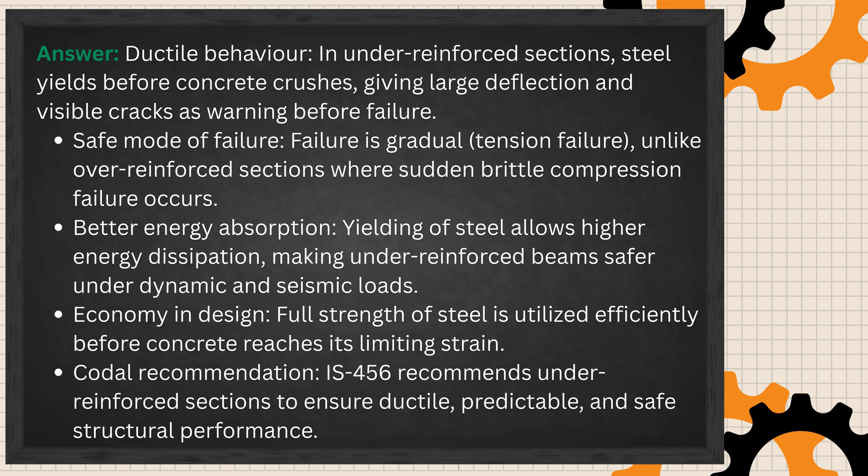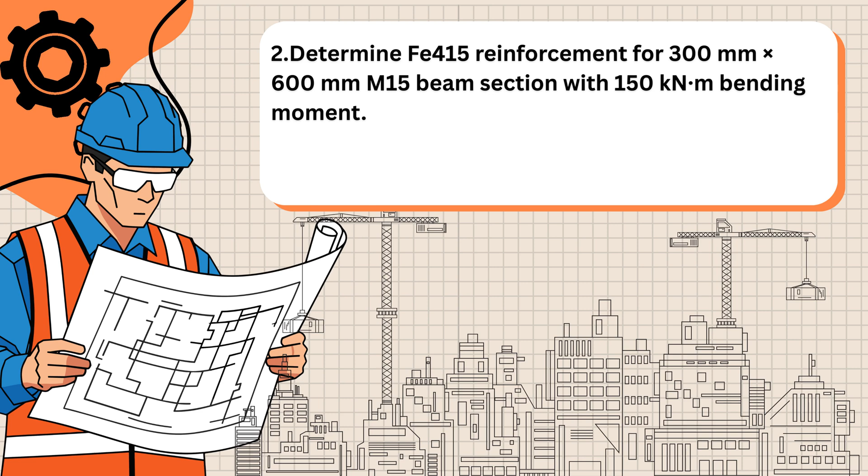2. Determine Fe 415 reinforcement for 300 mm x 600 mm M15 beam section with 150 kN·m bending moment. Answer. Given breadth B equals 300 mm, overall depth equals 600 mm, effective depth d equals 550 mm assumed, grade of concrete is M15, which means fck equals 15 megapascals. Grade of steel is Fe 415, which means fy equals 415 megapascals. Factored bending moment Mu equals 150 kilonewton meters, which equals 150 times 10 to the power of 6 newton millimeters.

Step 1. Check limiting moment of resistance. Mu lim equals 0.138 times fck times b times d squared. Mu lim equals 0.138 times 15 times 300 times 550 squared, approximately 187.9 times 10 to the power of 6 newton millimeters. Since Mu is less than Mu lim, the section is singly reinforced.

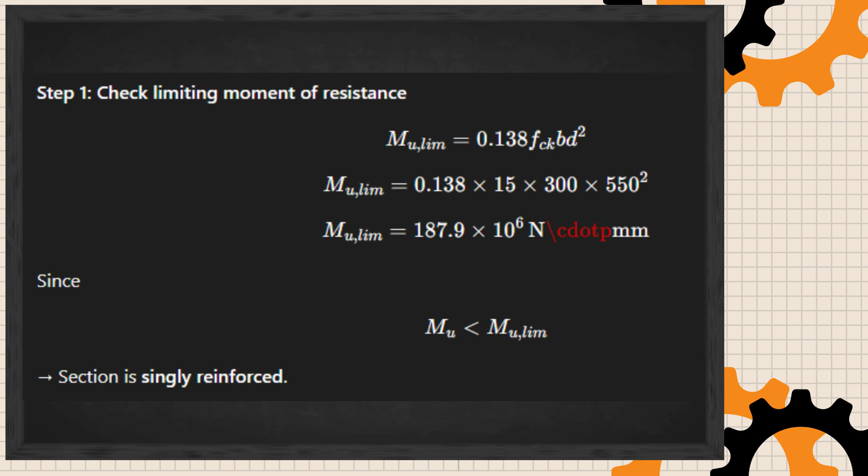Step 2. Calculate area of tensile steel. The formula is Mu equals 0.87 times fy times Ast times d minus 0.42 times Xu. For Fe 415, Xu max equals 0.48 times d equals 0.48 times 550, which equals 264 millimeters. Z equals d minus 0.42 times Xu max equals 550 minus 0.42 times 264, which equals 439 millimeters. Now, Ast equals Mu divided by 0.87 times fy times z, Ast equals 150 times 10 to the power of 6 divided by 0.87 times 415 times 439, Ast is approximately 947 square millimeters.

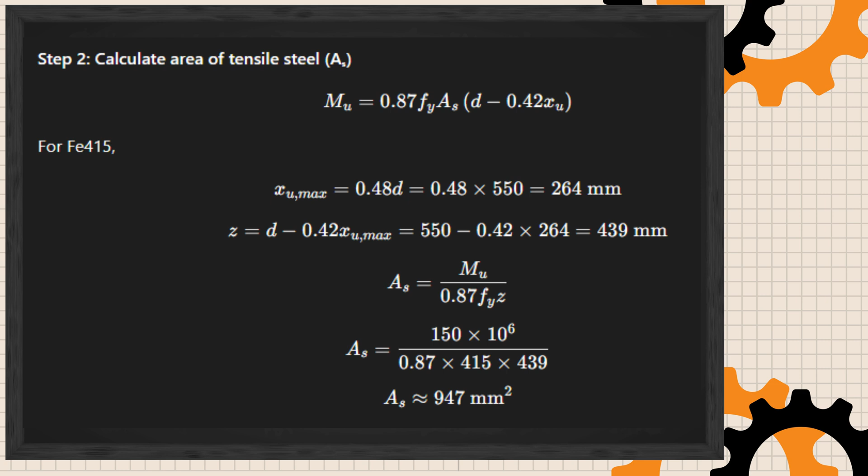Step 3. Provide reinforcement. Provide 3 bars of 20 mm diameter. The area of steel provided, Ast provided, is 3 times 314, which equals 942 square millimeters, approximately equal to the required area of steel. Final answer. Required tensile steel area equal to 947 square millimeters. Provide 3 numbers of 20 mm diameter Fe 415 bars in tension zone.

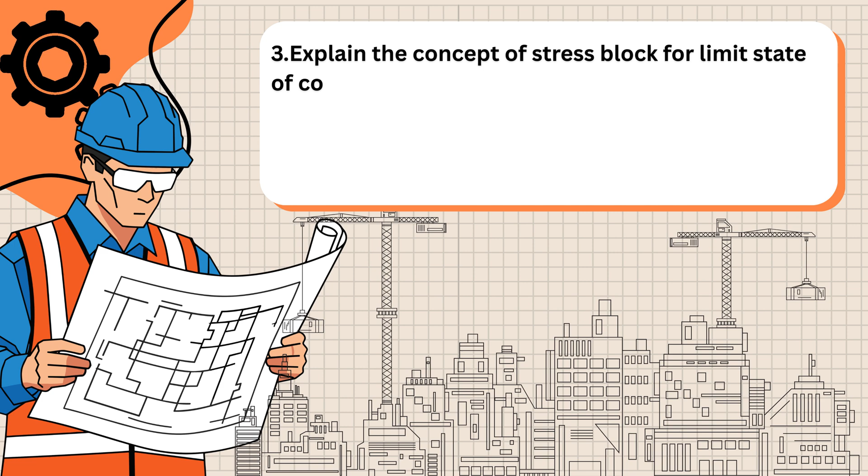3. Explain the concept of stress block for limit state of collapse in flexure. Answer. Concept. In limit state method, IS 456-2000, the stress block represents the assumed distribution of compressive stresses in concrete at the ultimate limit state of flexural collapse. Strain assumption: plane sections before bending remain plane after bending, and the maximum compressive strain in concrete at the extreme compression fiber is 0.0035. Stress distribution: the actual nonlinear stress strain curve of concrete is replaced by an equivalent rectangular stress block for design simplicity.

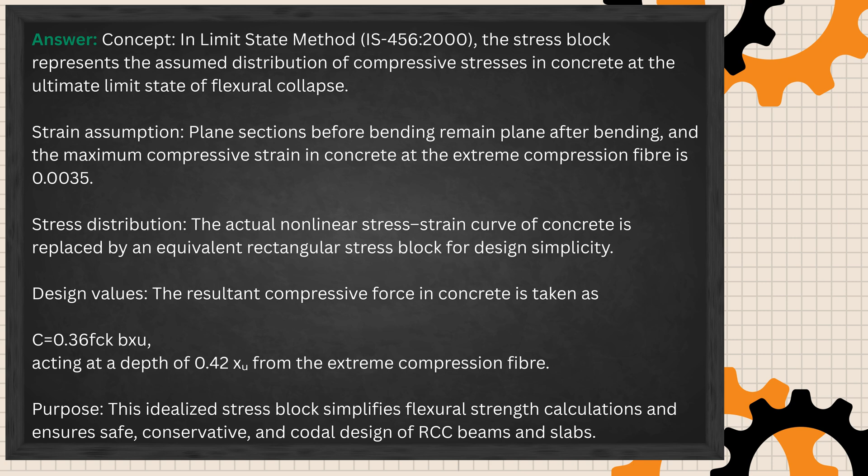Design values. The resultant compressive force in concrete is taken as equal to 0.36 fck b Xu, acting at a depth of 0.42 Xu from the extreme compression fiber. Purpose. This idealized stress block simplifies flexural strength calculations and ensures safe, conservative, and codal design of RCC beams and slabs.

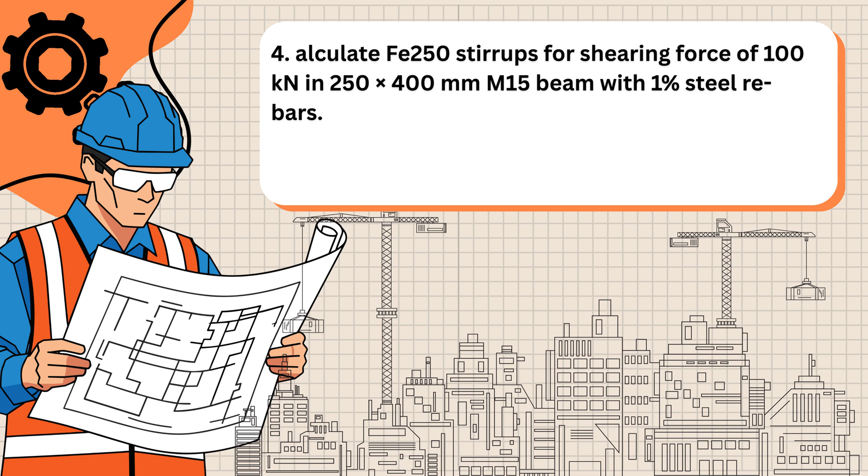4. Calculate Fe 250 stirrups for shearing force of 100 kN in 250 x 400 mm M15 beam with 1% steel rebars. Answer. Given breadth of beam B equals 250 mm, overall depth equals 400 mm, effective depth d equals 350 mm assumed, grade of concrete is M15, which means fck equals 15 megapascals. Grade of steel, stirrups, is Fe 250. Percentage of tension steel equals 1%. Factored shear force Vu equals 100 kilonewtons, which equals 100 times 10 to the power of 3 newtons.

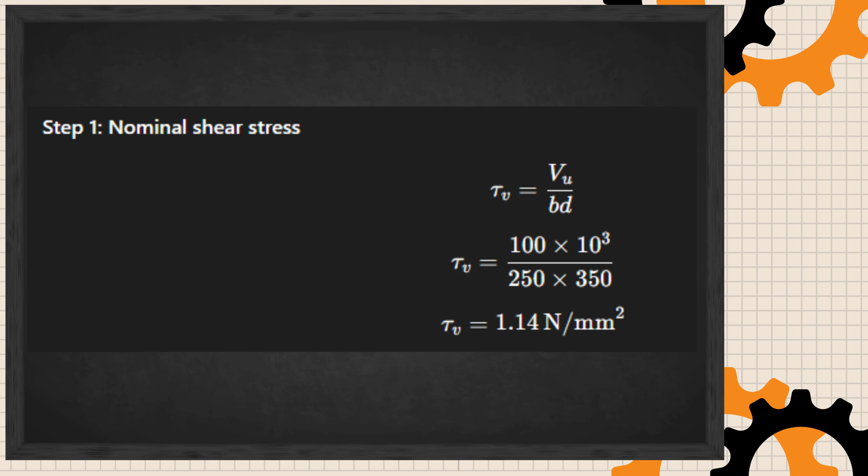Step 1. Nominal shear stress. The formula for nominal shear stress, Tv, is Vu divided by b times d. Substituting the values, Tv equals 100 times 10 to the power of 3 divided by 250 times 350. This simplifies to Tv equals 1.14 newtons per square millimeter. Step 2. Design shear strength of concrete. From IS 456 Table 19, for M15 concrete and 1% steel, the shear strength of concrete Tc equals 0.48 newtons per square millimeter. Since Tv is greater than Tc, shear reinforcement is required.

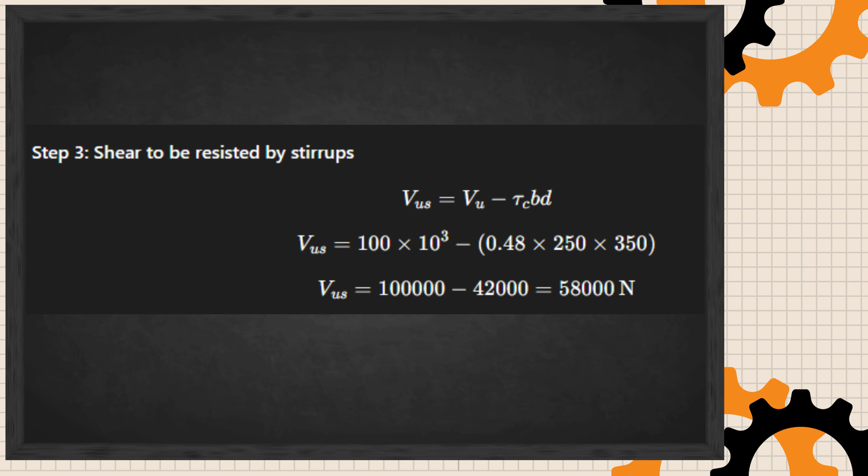Step 3. Shear to be resisted by stirrups. The formula for shear to be resisted by stirrups, Vus, is Vu minus Tc times b times d. Substituting the values, Vus equals 100 times 10 to the power of 3 minus 0.48 times 250 times 350. This simplifies to Vus equals 100,000 minus 42,000, which equals 58,000 newtons.

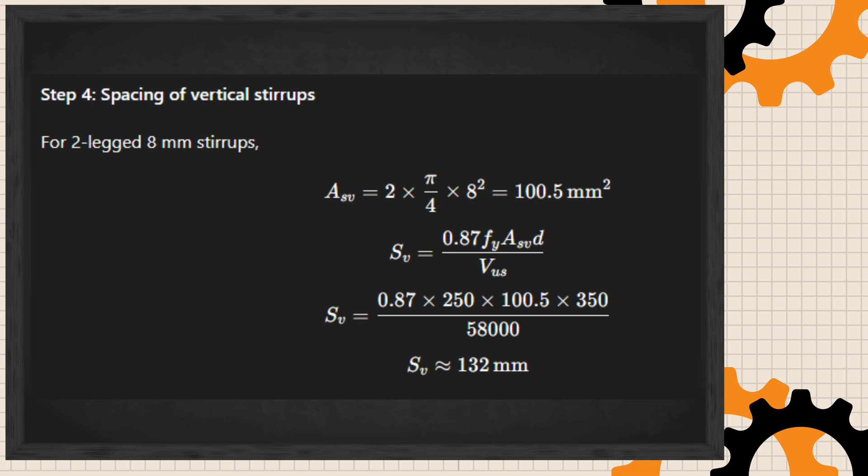Step 4. Spacing of vertical stirrups. For two-legged 8 mm stirrups, the area of stirrups Asv is 2 times pi by 4 times 8 squared, which equals 100.5 square millimeters. The formula for stirrup spacing Sv is 0.87 times fy times Asv times d divided by Vus. Substituting the values, Sv equals 0.87 times 250 times 100.5 times 350 divided by 58,000, this simplifies to Sv equals approximately 132 millimeters.

Step 5. Check maximum spacing, IS 456. The formula for maximum spacing, Smax, is the minimum of 0.75 times d and 300. Substituting the values, Smax equals the minimum of 262.5 and 300, which equals 262.5 millimeters. Final answer, two-legged 8 mm diameter Fe 250 vertical stirrups at 130 mm c/c along the beam.

5. Explain in brief the structural design procedure of RCC piles and pile cap. Answer. Structural design of RCC piles. Load assessment: determine axial load, lateral load, and bending moment from superstructure including self-weight of pile, as per IS 456. Pile capacity: check safe load capacity of pile based on end bearing and skin friction obtained from soil data. Structural design: design pile as a short compression member. Check for axial load with minimum eccentricity and bending using interaction criteria.

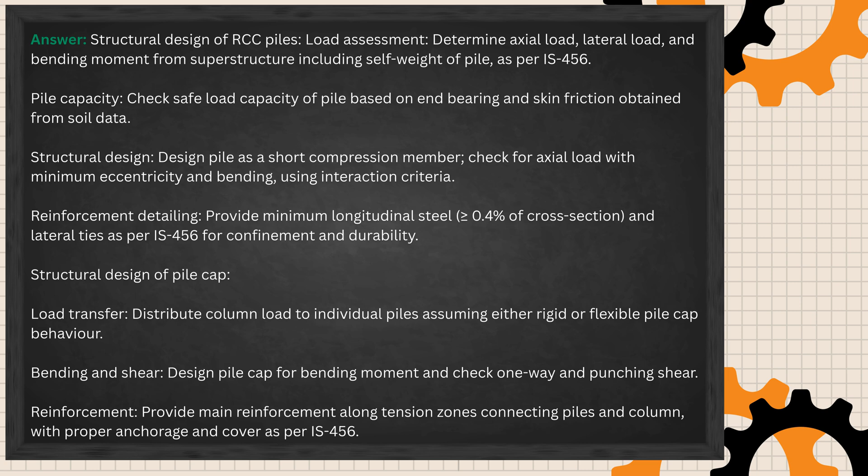Reinforcement detailing: provide minimum longitudinal steel greater than or equal to 0.4% of cross-section and lateral ties as per IS 456 for confinement and durability. Structural design of pile cap. Load transfer: distribute column load to individual piles, assuming either rigid or flexible pile cap behavior. Bending and shear: design pile cap for bending moment and check one-way and punching shear. Reinforcement: provide main reinforcement along tension zones connecting piles and column with proper anchorage and cover as per IS 456.